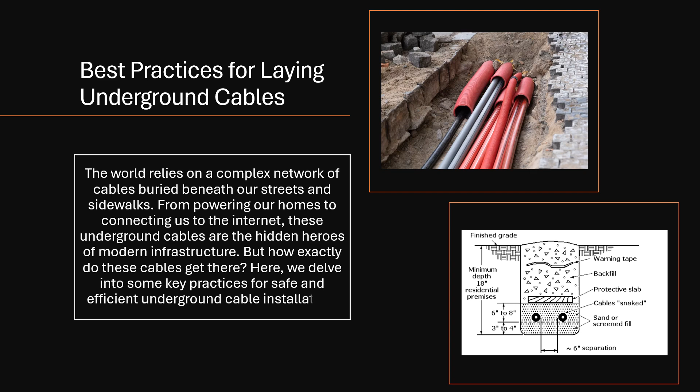Best practices for laying underground cables. The world relies on a complex network of cables buried beneath our streets and sidewalks. From powering our homes to connecting us to the internet, these underground cables are the hidden heroes of modern infrastructure. But how exactly do these cables get there? Here, we delve into some key practices for safe and efficient underground cable installation.

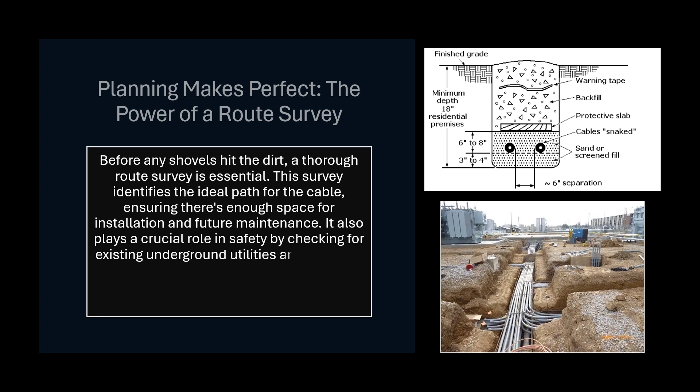Planning makes perfect. The power of a route survey. Before any shovels hit the dirt, a thorough route survey is essential. This survey identifies the ideal path for the cable, ensuring there's enough space for installation and future maintenance. It also plays a crucial role in safety by checking for existing underground utilities and potential hazards. Think of it as drawing a roadmap for your cables, avoiding any unwanted detours during installation.

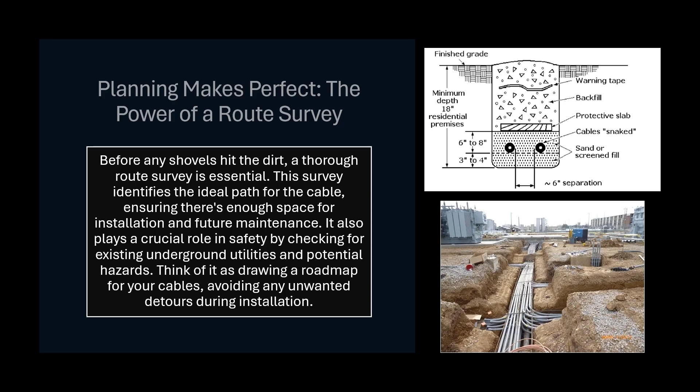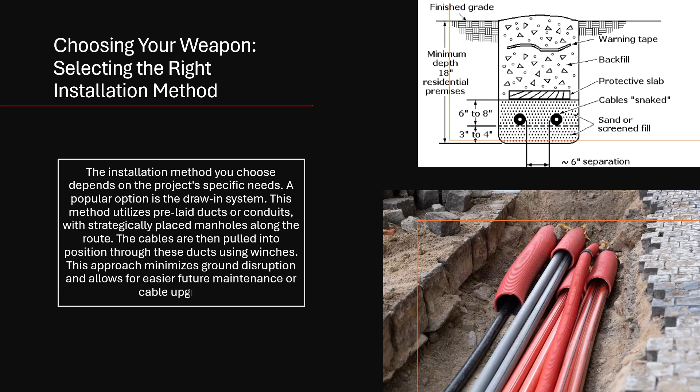Choosing your weapon, selecting the right installation method. The installation method you choose depends on the project's specific needs. A popular option is the draw-in system. This method utilizes pre-laid ducts or conduits, with strategically placed manholes along the route. The cables are then pulled into position through these ducts using winches. This approach minimizes ground disruption and allows for easier future maintenance or cable upgrades.

Strength in numbers, tools for the trade. When it comes to cable installation, the right tools make all the difference. Cable pulling winches provide the necessary pulling force to accurately position the cables within the ducts. For situations requiring minimal surface disruption, boring tools come into play. These tools create precise underground pathways for the cables, ideal for environmentally sensitive areas or avoiding existing infrastructure.

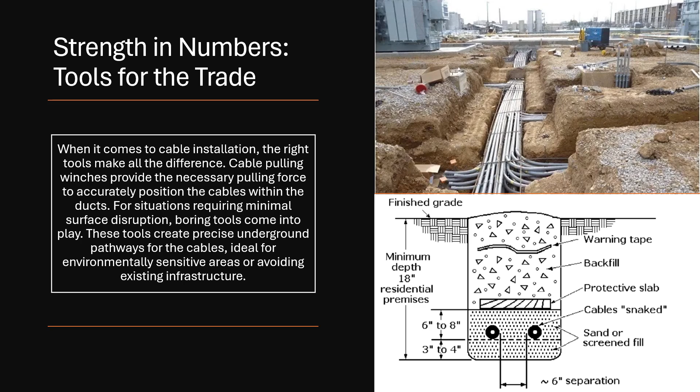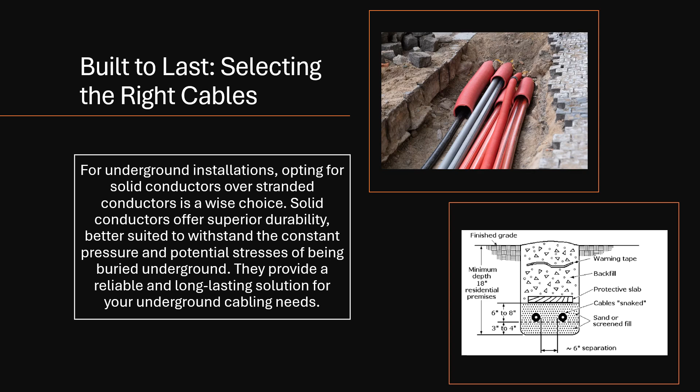Built to last, selecting the right cables. For underground installations, opting for solid conductors over stranded conductors is a wise choice. Solid conductors offer superior durability, better suited to withstand the constant pressure and potential stresses of being buried underground. They provide a reliable and long-lasting solution for your underground cabling needs.

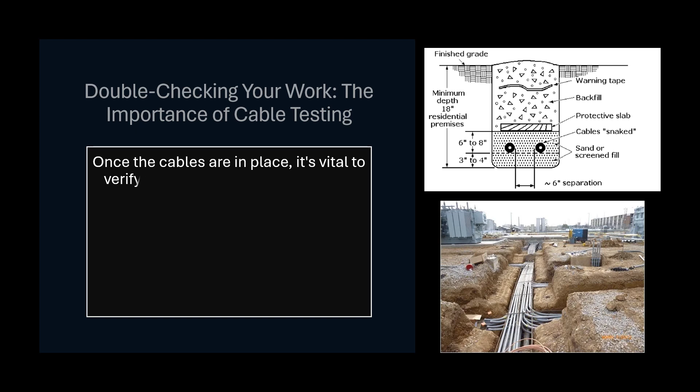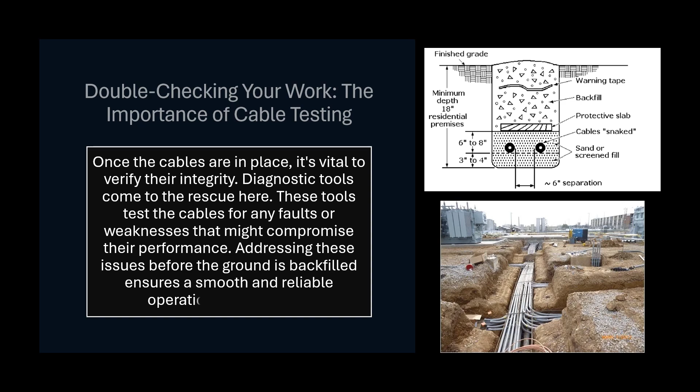Double-checking your work. The importance of cable testing. Once the cables are in place, it's vital to verify their integrity. Diagnostic tools come to the rescue here. These tools test the cables for any faults or weaknesses that might compromise their performance. Addressing these issues before the ground is backfilled ensures a smooth and reliable operation of the cables.

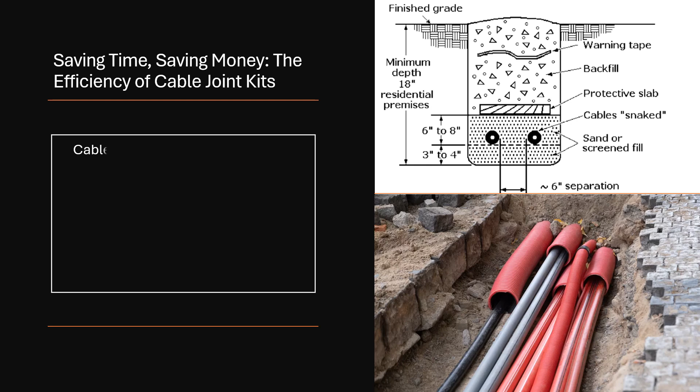Saving time, saving money. The efficiency of cable joint kits. Cable joint kits are a valuable time-saving resource. These kits provide all the necessary materials and instructions for creating secure and reliable connections between cable sections. This streamlined approach minimizes installation time and associated costs, ensuring a more efficient project completion.

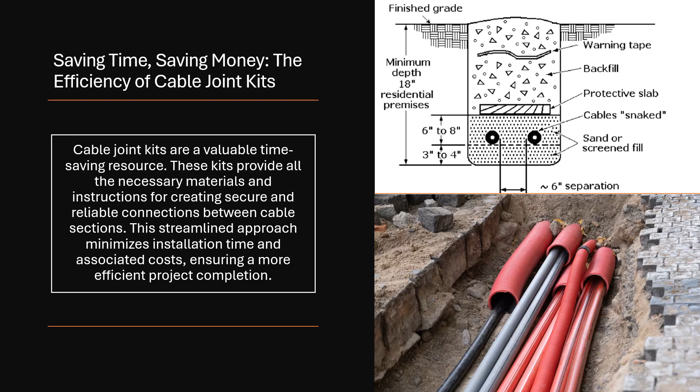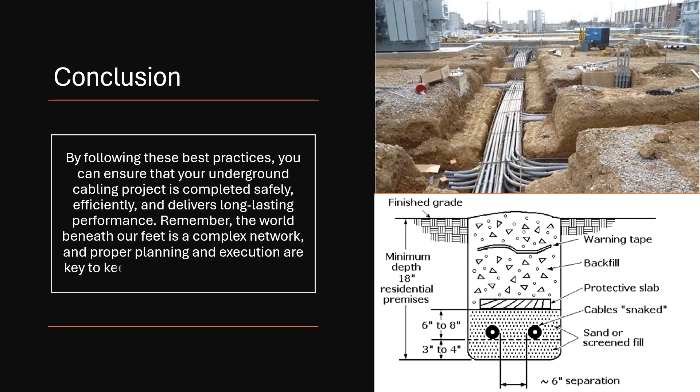Conclusion. By following these best practices, you can ensure that your underground cabling project is completed safely, efficiently, and delivers long-lasting performance. Remember, the world beneath our feet is a complex network, and proper planning and execution are key to keeping it functioning smoothly.